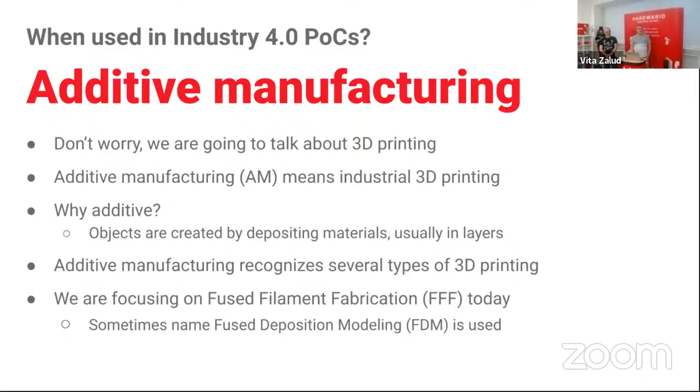To make clear some abbreviations we will use, we will see 3 of them here on this slide. AM means additive manufacturing - this is an umbrella of the topics we are talking about today. Then there will be FFF, which is fused filament fabrication, and sometimes it is called FDM, which is almost the same - it means fused filament fabrication or fused deposition modeling. As I said, 3D printing. So don't be trapped, don't be confused during our speech - someone of us will use different words. So it's additive manufacturing, and everything is about 3D printing.

What are the advantages of 3D printing? We can imagine all of them, but in general we are able to create some prototypes and temporary parts, which is very useful. The prototypes are used when we think about something new and are not willing to wait until it will be created by some machine or special construction guys - we can prototype what we want. Or temporary parts, something when broken, we have no spare part available, so we can create this temporary part for a while.

3D printing is useful for fast production. When we need to have something very quickly, we will do that. In HARDWARIO, we do use it for boxes or for some holders for sensors. So this is fast production.

Reliable materials is the topic which will be covered by guys from Filamentum, but nowadays materials in 3D printing are really amazing. You can imagine almost everything is printable - we will see the word 'almost' after that. And there is, of course, the fast return of investment. It means we started very quickly, very easily, and we can receive the money or the benefits from this activity.

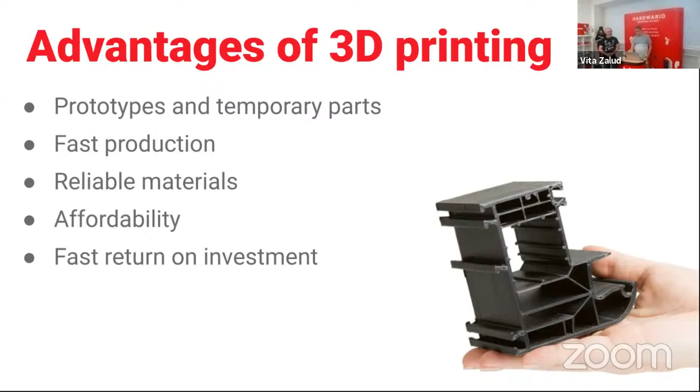Speaking about fast production, we all know what happened during the coronavirus, so how 3D printing really helped in many cases in healthcare and all these affected areas. That was a perfect example of how we can use 3D printing.

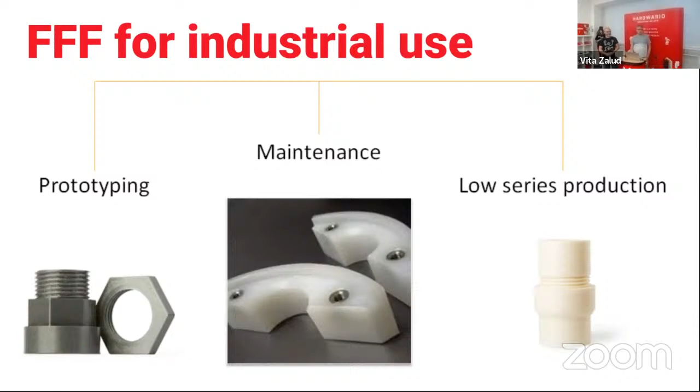This picture shows the areas where FFF for industrial use is used: prototyping, maintenance, and low series production. Everything you see there are real products printed by guys from Filamentum, so it's really used.

What are the key parameters for application for additive manufacturing? We need to do it fast, so fastness is one of the parameters. The idea we are creating needs to be easy to draw and produced immediately. It means if we are talking about something really difficult, AM wouldn't be the right choice. But if we are talking about some simple things, it is a good choice.

We have new options. We have the possibility to produce shapes which were impossible to make in the past. Why? Because we don't need to mold, we can model it. It's pretty different, and we can build it from flat to very complex shapes. We will see there are some materials which can be used like a support and will disappear after some activity, maybe with hot water or something like that. So we are able to do it.

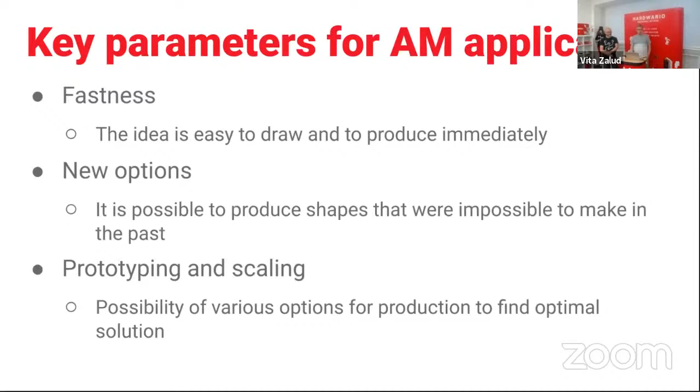And of course, the prototyping and scaling we talked about in the slide before. We have a variety of options to find the optimal solution.

Let's talk a little bit about the principle, how material extrusion technology works. This is what everyone can imagine when we say we will 3D print it. That's something we can imagine - there will be something which presses the material, the plastic, on the pad and builds the structure.

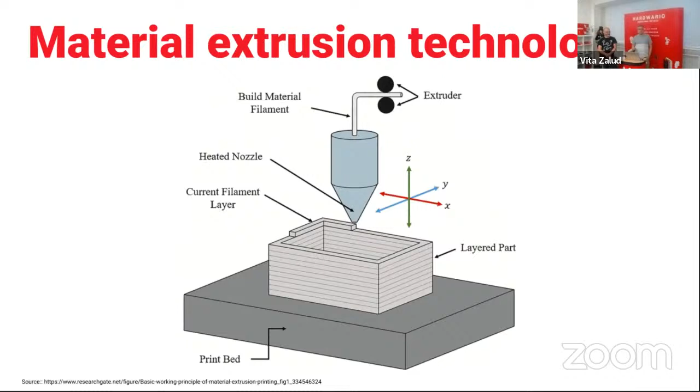So why is it possible? Because on the top of the picture, you can see the extruder where the material is fused, and this material is pressed through the heated nozzle, which draws the layers of the filament onto the object we are printing. This is really an example of how it is designed, and of course in reality it is much more difficult, but this is the principle.

Now, one of the most difficult questions in 3D printing is how to choose the right material, because nowadays there are plenty of materials which can be used, and every application, every model needs something different. So we have to follow the application requirements. What do we need to do? Must it be water resistant, or chemical resistant, or resistant against temperature? Every time it is a different material we will use.

We are all, of course, limited by printing technology. We have 1 or 2 3D printers in regular offices, so it's necessary to have material which we are able to print, and we need to follow some parameters. You can see there is a clickable link, a guide for material selection, which leads to the site of guys from Filamentum, where there is a very nice guide on how to choose the right material for your purposes. I will not open it because guys will talk about it after a while. So feel free to use it whenever we send you the follow-up of this presentation.

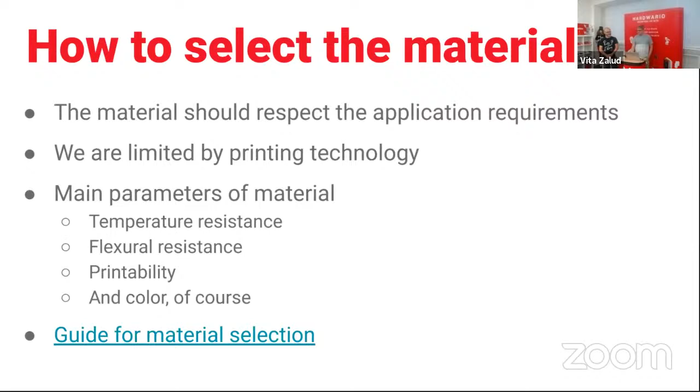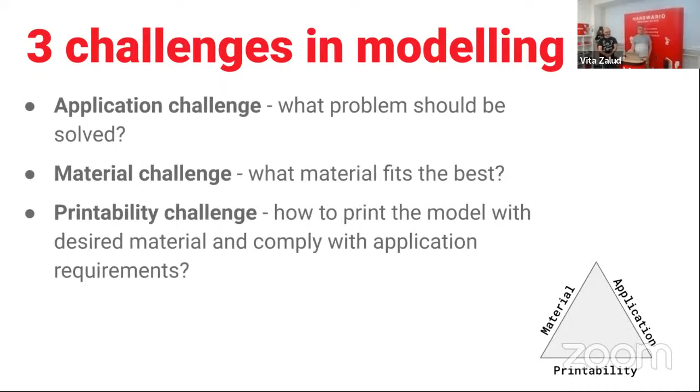Let's see what challenges in modeling are here. You can see the triangle in the bottom right corner, which shows there is something the application is requesting, there is something the material is providing, and there is a trouble or problem of how to print it - the printability challenge. All three of these challenges need to be considered during the designing of the model and choosing the material at one time, and need to be well balanced. Martin will maybe talk about it after a while, but keep in mind this is a discipline - not only to choose the right color of the material, but to think about how we will print this result.

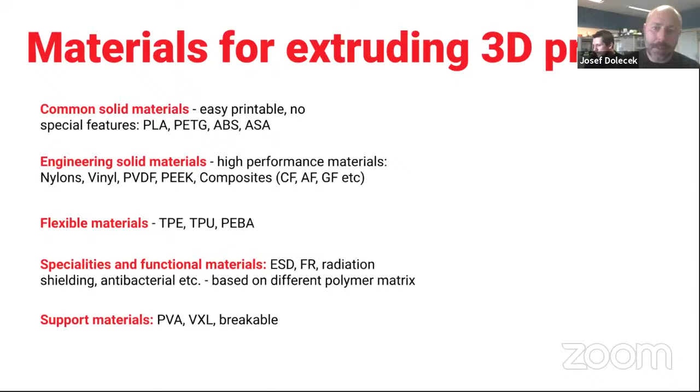And the last one is called the support materials group, where you find material printed just to be a support for the building material. There you can find PVA, polyvinyl alcohol, which is soluble in water. You can find VXL material soluble in hydroxide, and breakable HIPs, etc. These are support materials helping print difficult parts.

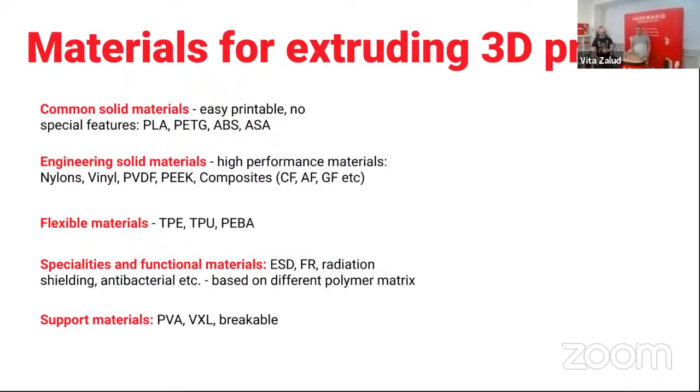Okay, thank you, Josef. And we'll move to another slide, which will show a little bit how 3D printing is used here at HARDWARIO. How does our tool chain look like? We have a 3D printer here.

We are using a software called OpenSCAD for modeling. Why did we choose OpenSCAD? Because it is multi-platform software - you can use it on every operating system we use. It's programming-like oriented, which is a very important point. Other CAD software is used from, let's say, a graphical point of view, but we use it like scripting.

If we are willing to create a cube, we will write the script 'cube'. I will show you in an experiment, and it helps us provide the data for our friends - the makers and guys who are willing to print HARDWARIO kit boxes and enclosures. So we have stored this data on GitHub.

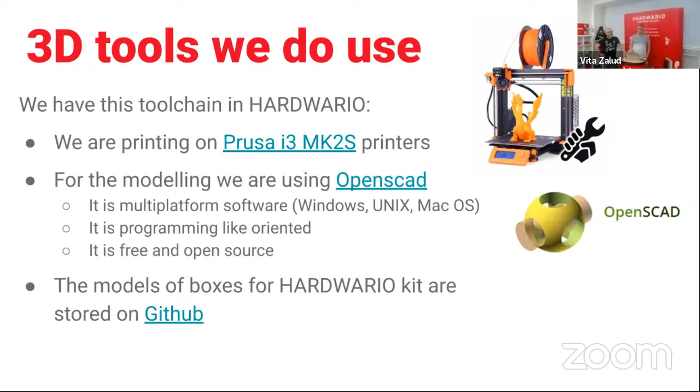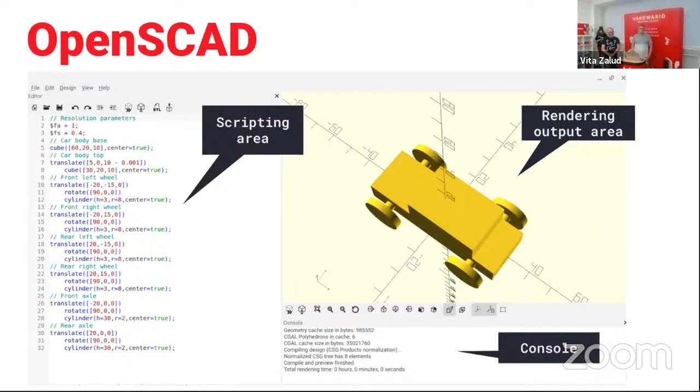How does OpenSCAD look like? You can see the scripting area on the left side. If you look at it, you can read there is a cube, a cylinder, rotate - some programming language style, how to create a part, which is possible to see in the rendering output area on the right side. This is the result of our work. On the bottom there is a console window where we are able to see errors or something like that.

So this is about OpenSCAD, and because it's very often the question what file formats are used in 3D printing, we have the file formats here. The most common format for 3D printing is STL, which describes how the model should be printed.

This STL file is a product of the modeling. Then this STL is imported to the software for the 3D printer, and it creates something called G-code, which is a numerical control programming language that tells the machine how the model should be realized. In case of 3D printing, how it should be printed. If there is some different machine, how it could be cut. So this is STL and G-code.

There are some new or newer formats. One is called WRL, virtual reality modeling language. It's a newer format, and the main difference from STL is it contains coloring. In case of STL, there is a single color only. In case of WRL, we can have more colors. And if the printer is a multicolor or multi-material printer, then it is easy to operate.

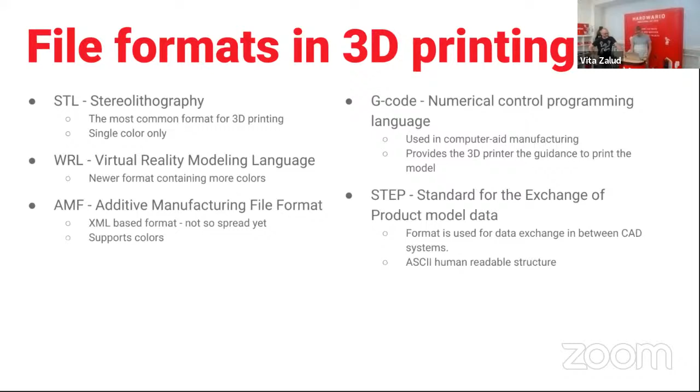Okay, so that was the theory, and we learned something. Now we can use this theory in our experiment.

As you told me a few minutes ago, there's some change. I have a little surprise for the guys from Filamentum, because my OpenSCAD has crashed on me, and this is perfect—this is what I like the most, that during the webinar there's a situation like this.

So we will skip the experiment and start with the Filamentum experiment instead, if you don't mind, guys. We will skip this first one—maybe later we'll create some time for it. Later we will show you how to print some platform for an ABB box using our HARDWARIO kit. But now it's time for Filamentum, and they will show us a holder for a Dallas thermometer, which we use in many projects because it's a very popular external thermometer, and it's easily connected to the HARDWARIO kit and IoT hub.

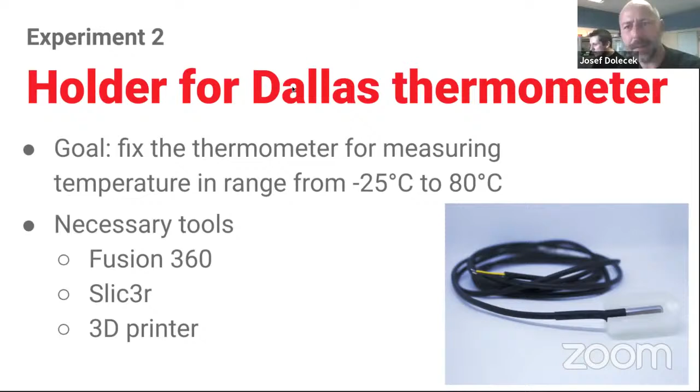So, as Vita said, we have the comparison chart. We have a chart of material comparison on our web page, which helped us choose the proper material for printing the holder for the sensor.

Because the environment where the sensor is expected to be placed is industrial—the tube will contain probably hot water, so the maximum temperature is expected to be 80 degrees centigrade. There would be for sure some tension in the model after placing it on the tube. So therefore we chose nylon.

FX256, which is a long chain polyamide based 3D printing material, based on PA12. It has excellent mechanical properties, it's a crystalline polymer so it's durable and tough, it has excellent impact resistance even in minus temperatures, it's chemically resistant and absorbs less moisture than other polyamides like PA6. And it's also safe for food contact, so it can be placed in food production industry.

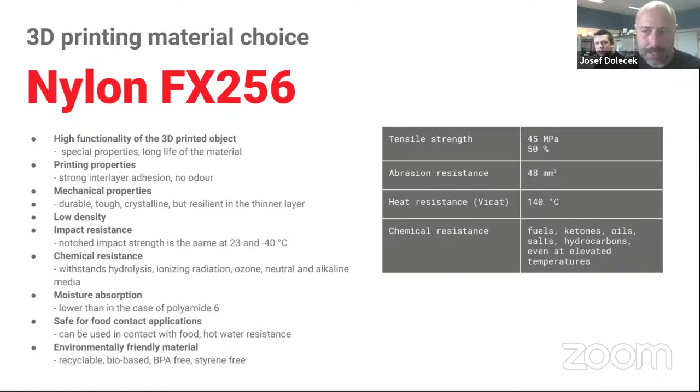So next slide, please. Yeah, there are all those features in short term.

When I mentioned that nylon is not a common material for printing, it needs a bit of an experienced user who can fight with warping in case the printer is not closed in a printing enclosure. Okay, so now I will share my screen to show you how we proceed.

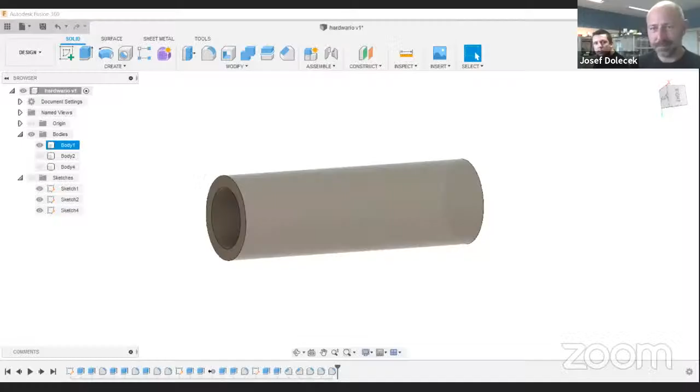Okay, now you should see my screen. As I said, we used Fusion 360, so we modeled part of the tube.

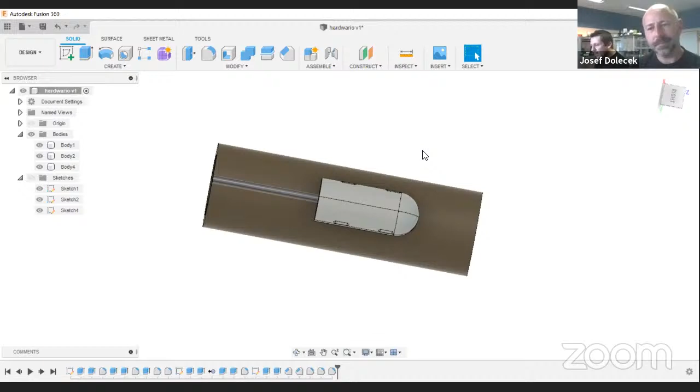We also added a thermometer according to measurements and the technical data sheet of the thermometer. Then we added a cover which holds the thermometer in place with perfect contact with the tube, and is easily replaceable if the thermometer breaks. It's connected by zip ties, so it should be fine for quick and easy change.

As we chose nylon FX256, there are some basic tips for modeling a 3D printed object. We recommend using rounded corners for touching the build plate, because sharp corners increase the internal forces when printing due to the crystallinity of nylon. So it's better to round corners and so on.

Also, if you are modeling thin walls or something, it's always good to account for layer and nozzle size. So if you are using a 0.4 or 0.5 nozzle, you have to use the parameters for walls at 0.4, 0.8, or 1.2 millimeters, always according to your nozzle.

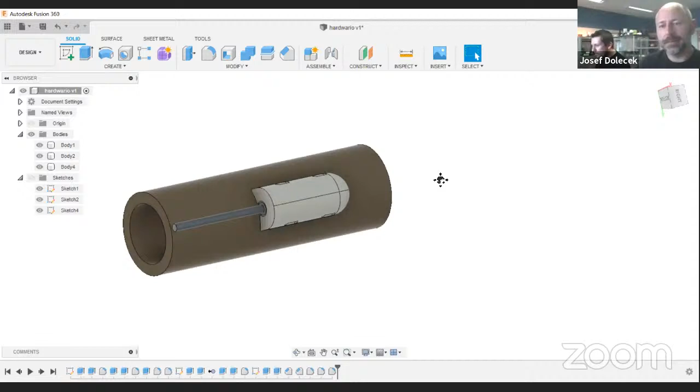Okay, so this is the model of the cover of the thermometer. We can export the body, and I always say export from these CAD programs in the highest resolution you can, because it gives you a better surface, no triangles in the surface, and so on.

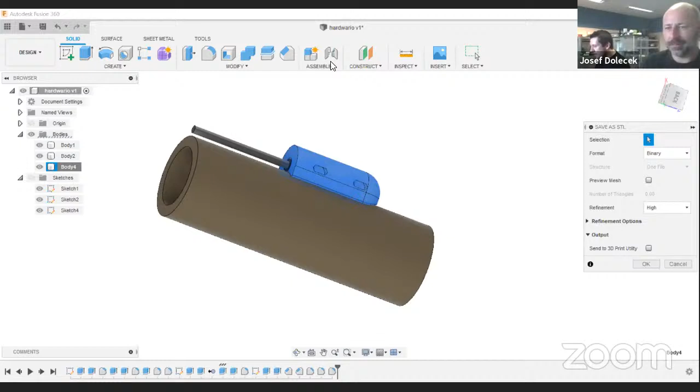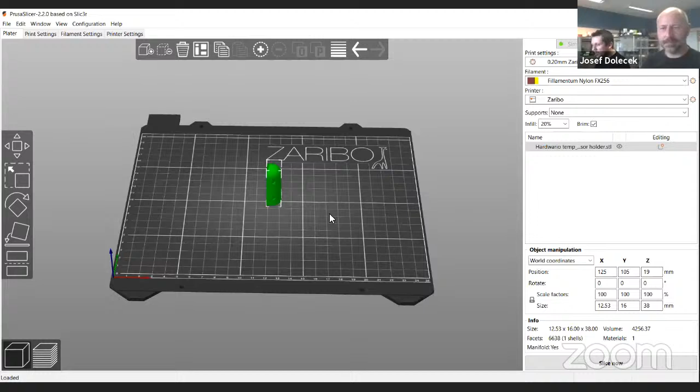Now I will show you the slicer. We will print on the Zaribo 320, which is a good printer we use in our lab. We have lots of printers in our lab because we test all of the materials in development and also from production batches to be sure that they are okay and in high standard quality.

So we have a model here. We don't need something special. The basic layer height is 0.2 millimeters. We have selected our nylon FX256 material profile and the printer.

20% infill is enough because the part is not under big stress, just from the hot water maybe, and so on. What's good to mention is to always bear in mind the orientation of the printed part. If you know the direction of load which the part should have, always place it perpendicular to the forces on the layers. It has better mechanical properties this way.

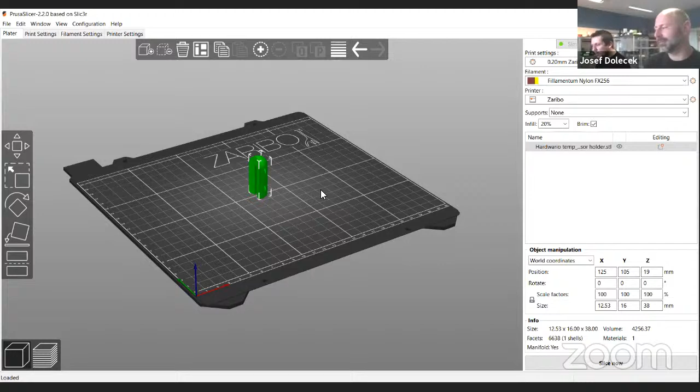Okay, so we are printing in nylon. I recommend using brim. So we slice it, and we have a sliced object. Put the G-code on the card and in the printer.

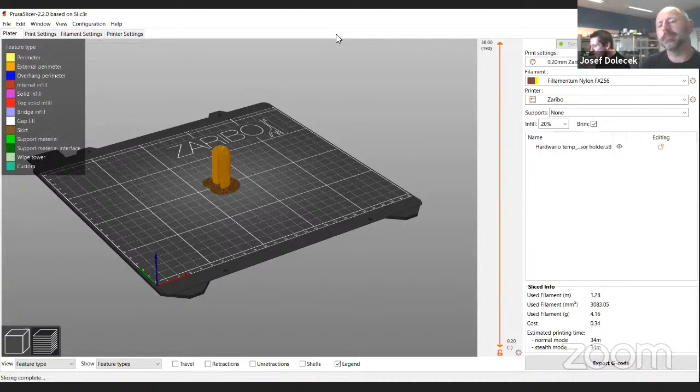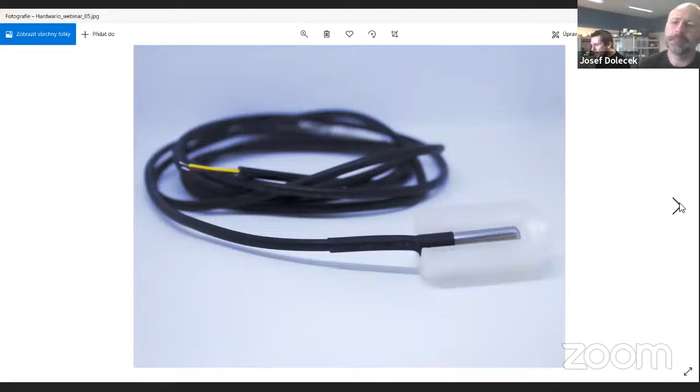I have used photos from production we have already printed. So this is the final printed product, this is how it looks. And this is mounted on the tube. Due to zip ties, it's easily removable and changeable if you have a broken thermistor. So I think it's good, and the material properties match our application.

Okay, so I think that's all from me.

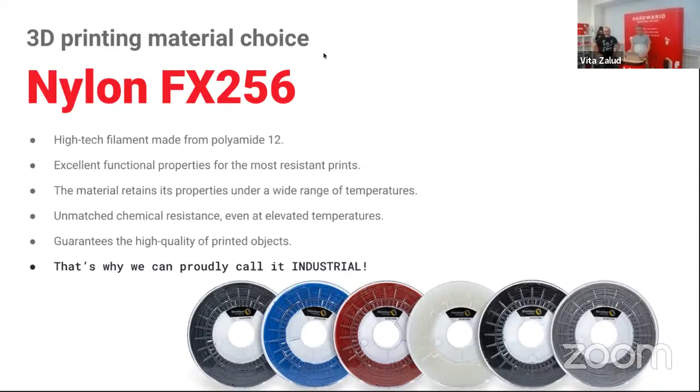Great, so now it's time for experiment number one. And it's all about something stored in this box. We usually call it ABB from this big company, and we are using it in many projects.

But to fit our hardware kit, we needed something special, and we call it the base platform. So now you are sharing. I do. So first of all, what is the goal?

The goal is to show you how easy it is to get the data from our GitHub link. I do share the GitHub, sorry, I will go here.

The link in the presentation you will receive leads directly to this page we call enclosures, which shows what is necessary to have for printing the platform. You can easily get the file called hio-platform1.scad, and I have it here inside OpenSCAD. You can see this yellow part is the platform, similar to the one on the screen, and I will show you very briefly how we do that and what we can do there.

There are some magic characters called modifier characters which can help us, I believe you see them on the bottom left corner, which can help us debug somehow the code of the 3D model. I have an element called node screw here, and if I mark it with the hash and preview it, you will see red cylinders showing what is highlighted. I can use another sign called percent, and again make a preview.

Now I can see these parts, which are other holes in our platform that seem to be transparent. And why is it important?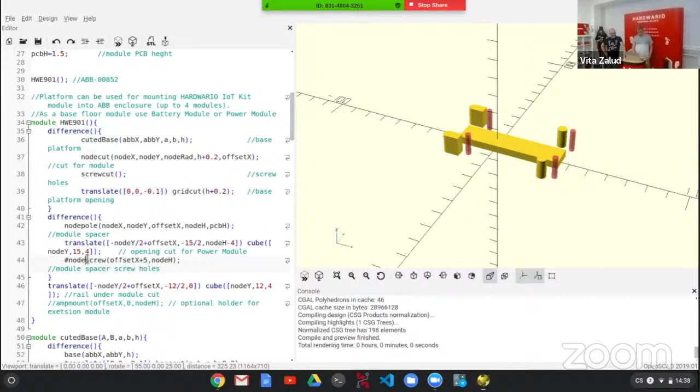In the x-axis alignment, I'll make it a little bit bigger to be more visible. Yeah, you saw it, it jumps. It does something else - it somehow causes the other parts to be broken, because the node screw itself is something called a module, and we can see it.

We can find it - node screw - and now there's a module called node screw, which is a definition of this node. Why is this there? Because we do it repeatedly, so we can use it as a subroutine in programming language.

That's why our guys love this software, because they can program almost all of the model. And at the end of the work, we have a slightly different structure. We'll just render it - it will take some time.

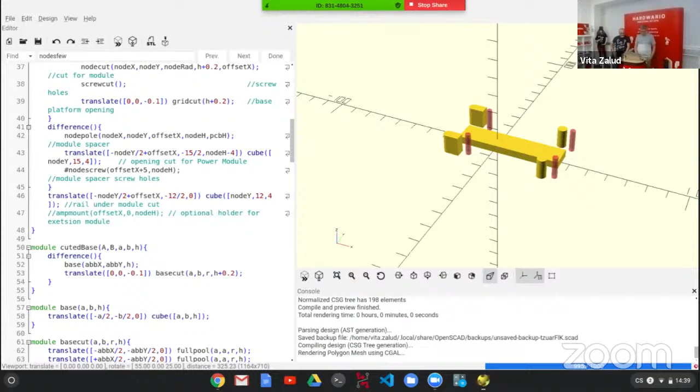And then when there's 1000, we have to wait a little bit. So now you can see the holes are outside of the platform. There's some small scratch on the platform, and we can easily save it to the STL file.

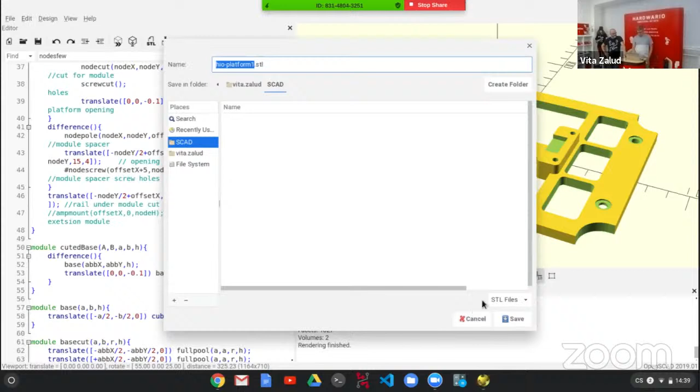I call it HARDWARIO platform 1 STL. Ta-da! And now I can go to my 3D printer and print whatever I want. So that's easy - OpenSCAD has a lot of features, it's let's say an electronic kit for making kits.

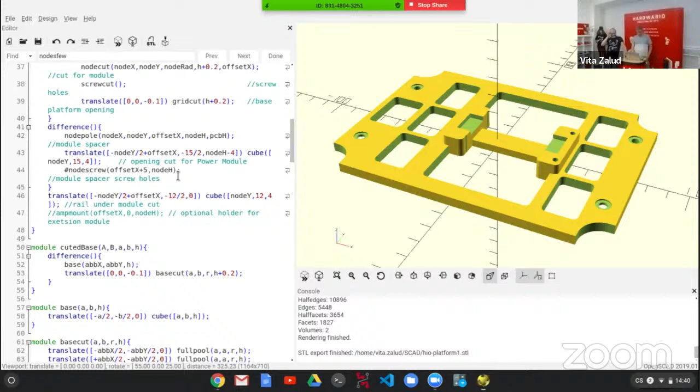So we can go back to our presentation, because I think it's the last slide in the experiment. It was first, but it is last. So you can go to apply and go back, please. You are so sorry, fast, so fast.

Because we learned this theory, we did two experiments. Thanks again, Filamentum, for your experiment, and we showed that it's not that difficult to model something very simple, like a platform for an IoT kit. Now it's time to show you that there are some real use cases in industry, because we are not experts in 3D printing - we are doing this just because of our kit and our maker's world.

But Filamentum is the right partner to show you some nice realizations. I can't wait to hear about the Rolls-Royce case study. So back to Filamentum, guys, it's your time to show us who you are, what you do, and what your best case studies are.

Feel free to call me when you need to move to the next slide. Okay.

So firstly, something about Filamentum. We are a younger company - we were established in 2012, 8 years ago. A younger team with a keen approach to polymers and amazed by new technologies.

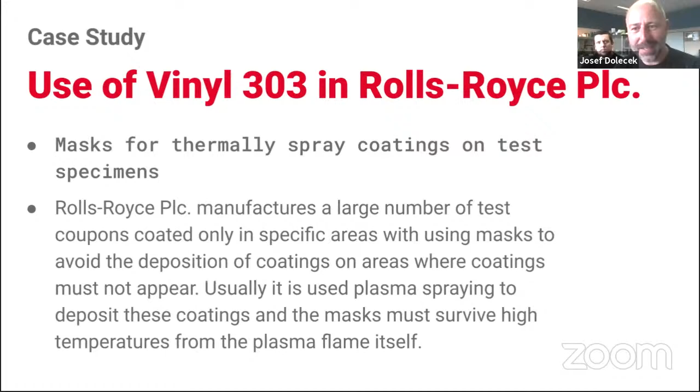As you know from home appliances, like tubing, covers of the roof, PVC is used in those applications successfully. It's a fantastic material with one big advantage - it's self-fire extinguishing, so it can be used also in this direct plasma coating.

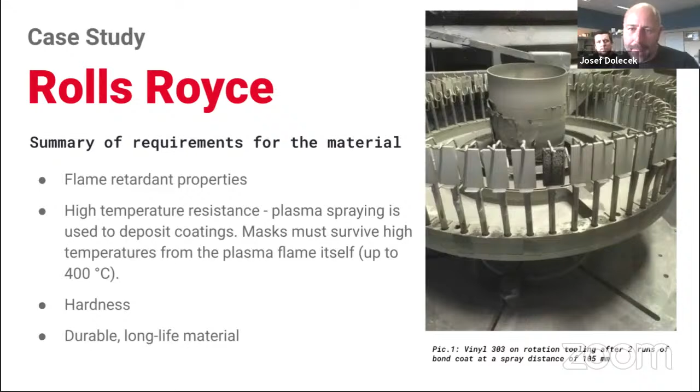So the company Rotorama produces racing drones. They have a special requirement for the materials because drones are small but very fast. Rotorama also used a camera holder on the drone, and the task was to print a holder, so they chose the material from Filamentum - thermoplastic polyurethane, TPU Flexfill.

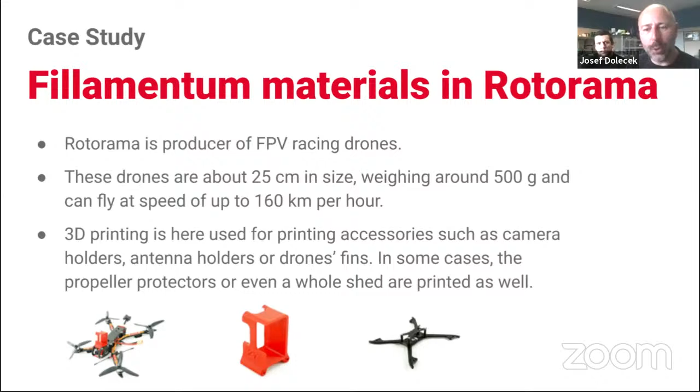Next slide please. Using those facts, it's a flexible material with a high level of elasticity. It has perfect interlayer adhesion, no warping, so the printing is amazing also for inexperienced users. And it has fantastic chemical and abrasive resistance.

So you can see the final part which can be mounted on the drone.

The ABS Extrafill is another story. The company knew that they needed a part which would have much better mechanical properties to be able to last in those conditions.

But ABS was used for prototyping, so they printed the parts, proved the shape, and proved that the model is correct. Then the final part was not 3D printed, but cut milled from carbon fiber reinforced resin. So you can see all three applications of 3D printing in industry: small scale production, prototyping, and maintenance or tooling.

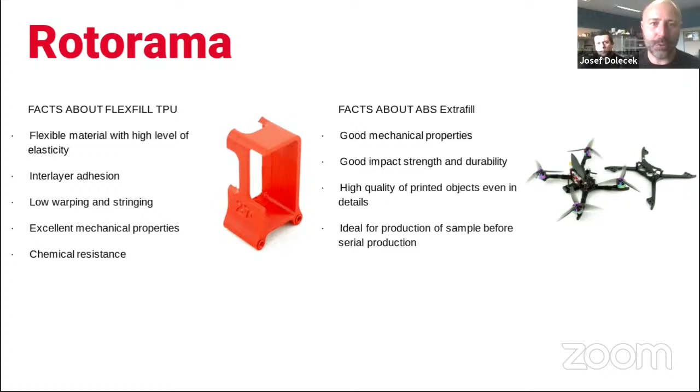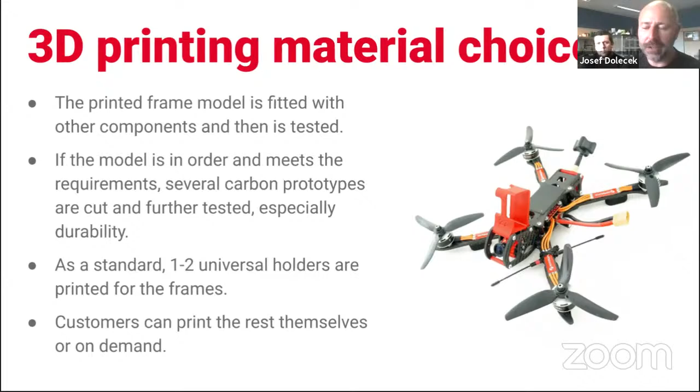Next slides. Yeah, this is what I was talking about. Here you can see the picture of the final product.

Maybe we should start, we have time for 2 or 3 questions. Lukáš, did you have the chance to see some important questions in the chat? Of course, I have prepared 2 questions for you, Vita. The first one is from Uri, and he asks if there is some need to learn or know some type of scripting language.

I don't think so. It's, let's say, kind of English, because the cube is cube, the cylinder is cylinder. So it is not so difficult, and the cheat sheet I showed you helps all the time. So the only thing you need is a geometric imagination of how objects like a sphere, cube, and cylinder will interact, and what is different from what. This is the most difficult part, but it is not difficult to code.

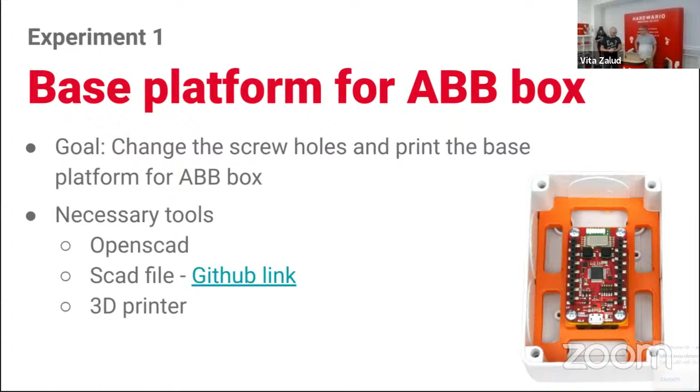We prepared something we call revolution, a typical disruptive innovation in industry - a combination of technology, business model, price model, all together, and we will share it with our partners very soon. You can register already on noworriesiot.com for more information, and we'll inform you what this is all about.

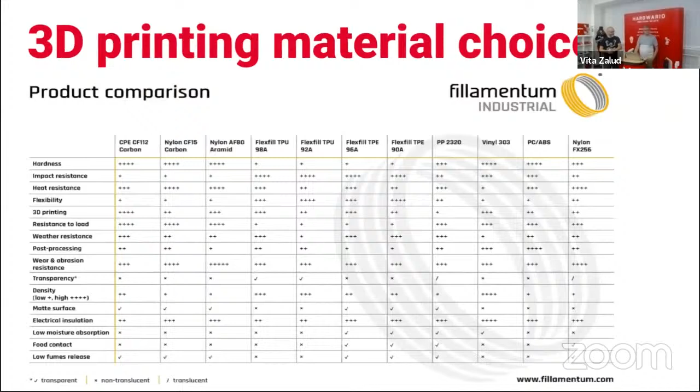We explained what additive manufacturing is. I believe some of us weren't aware of additive manufacturing itself - it was very nice to know it now. So it's AM, it's AM, and there is no PM. No, additive manufacturing is AM, only morning.

We have learned where additive manufacturing is useful. We saw some examples, we saw advantages of this, so we know it. We saw what the challenges for 3D modeling are in front of us. We remember the triangle of material, application and printability, so that's really important. Now we know how to choose the right material.

At the end of this presentation, we will share with you after the webinar an amazing table from the guys at Fillamentum, where a lot of information about materials is stored. And we know there is a good guide on the Fillamentum webpage, so go there and choose your material.

We saw how OpenSCAD is used here in HARDWARIO. It is really easy, and if you are a programmer, you will love it. We saw amazing case studies about Rolls-Royce and Rotorama, produced by the guys from Fillamentum, who showed the second experiment - which was actually first - about creating the holder for the Dallas thermometer.